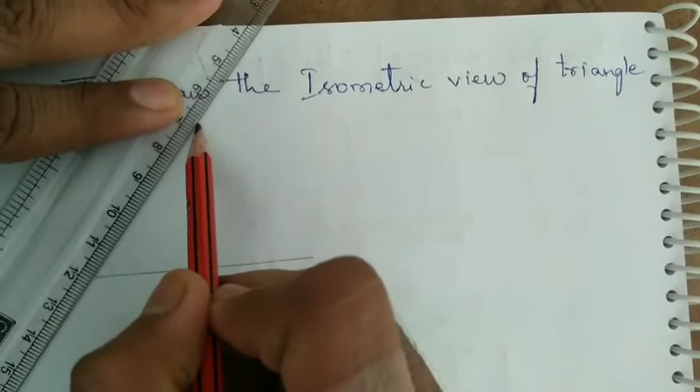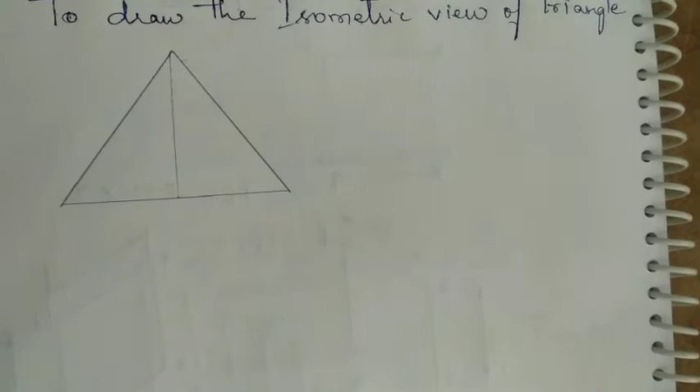This is the triangle we need to draw the isometric view of. How do we draw the isometric view? We need both the isometric front view and the isometric top view. The side given is 60 mm and the height is 40 mm.

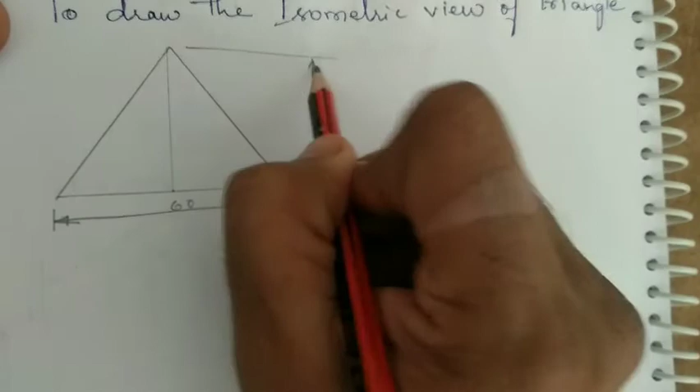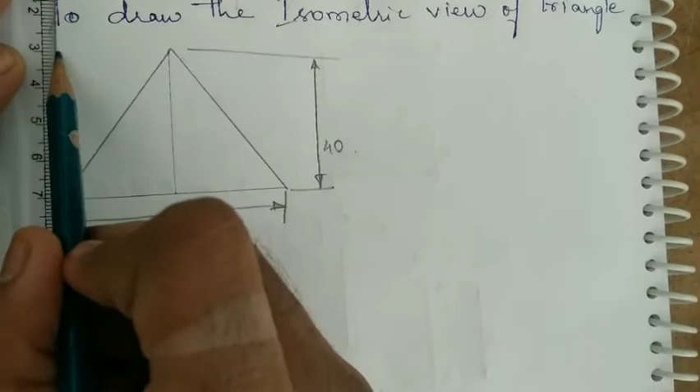So right now we need to draw the isometric view of this one. How do we construct it? We are already familiar with drawing a square, so based on that I'm going to construct this one by enclosing this triangle in a square box.

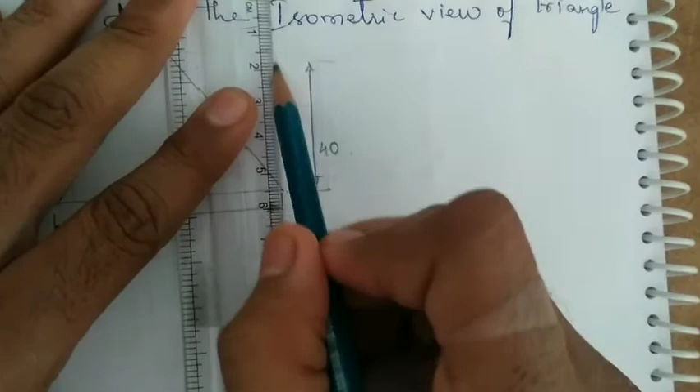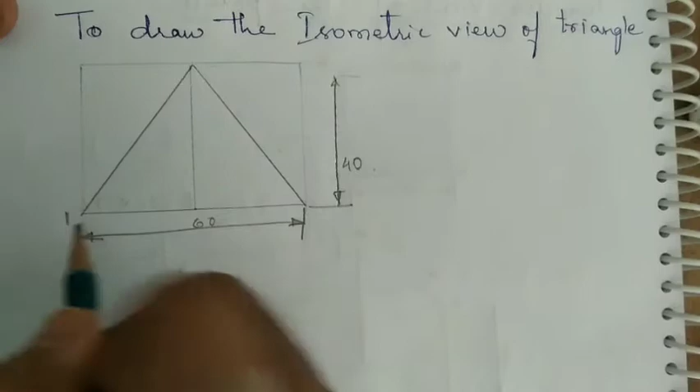Now that I am enclosing this complete triangle in a square box with borders, let me mark these points with capital letters 1, 2, 3, 4. Now I'll draw the isometric view of this one, representing both the front view and the top view.

Draw the horizontal line, and divide it into two parts. Now measure the height of this one, around 40 mm, and the side of this one, at an angle of 30 degrees.

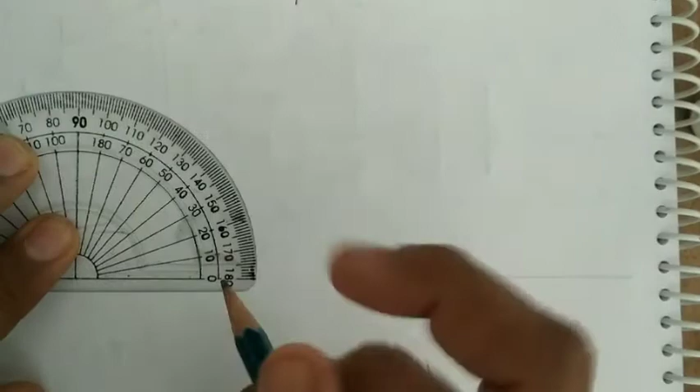So right now, from 1 to 4 the length is 60 mm. So I am taking 60 mm length over here at an angle of 30 degrees.

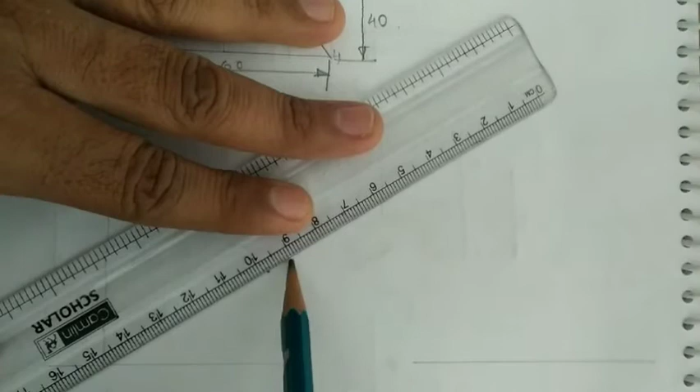And obviously this parallel height distance should be drawn at this corner. Now join this one with the parallel lines. Now you have drawn the isometric view of this one.

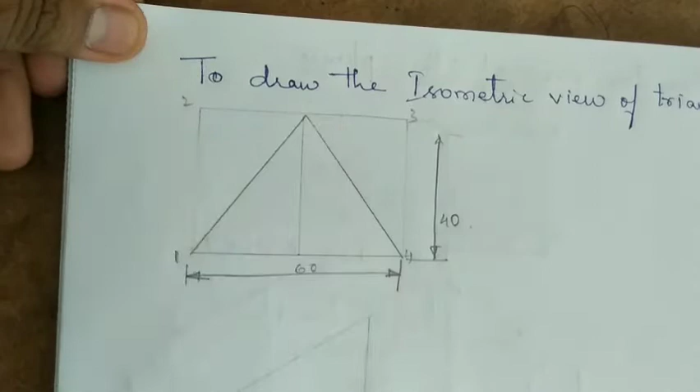That's the front view. Now measure the distance from 2 to half of this midpoint. Mark it on this isometric projection. You can use the compass for this, measuring the distance from 2 to half of this distance, and the same on the other side.

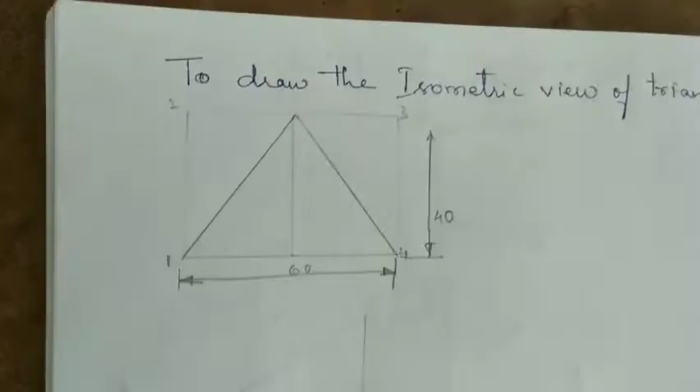First, before this, we make markings here: this one is 1, 2, 3, and this end is 4. Now with 2 as a center, cut down to find the midpoint. Now join it to this one.

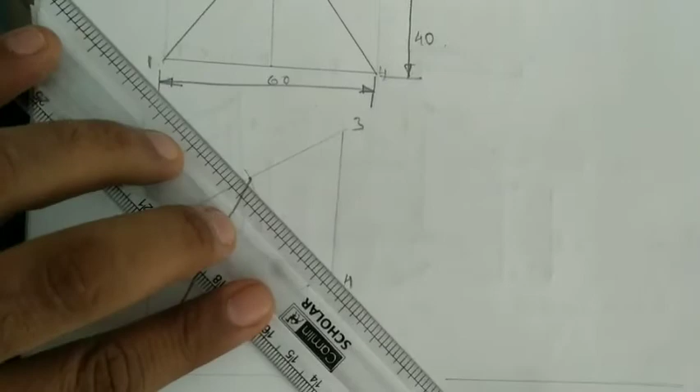And this bottom line should be darker. So this is my isometric view of the triangle.

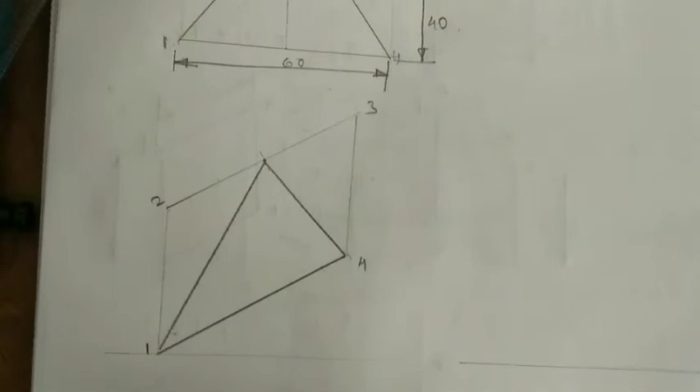This one we can take as the front view, and if required we can also take it as the side view. Now we need to draw the top view.

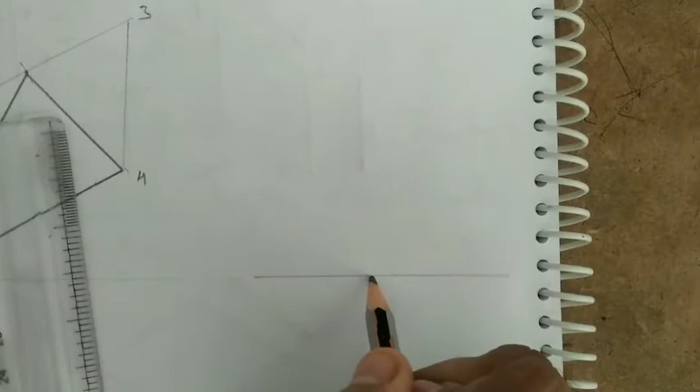In the same manner, for the top view, you need to draw two lines at 30 degrees. First I make a mark here. Considering point 1 is over here, I take point 1 and mark it at an angle of 30 degrees.

30 degrees over here, 30 degrees over here. So from 1 to 2 I take this side, and from 1 to 4 I take this side, at an angle.

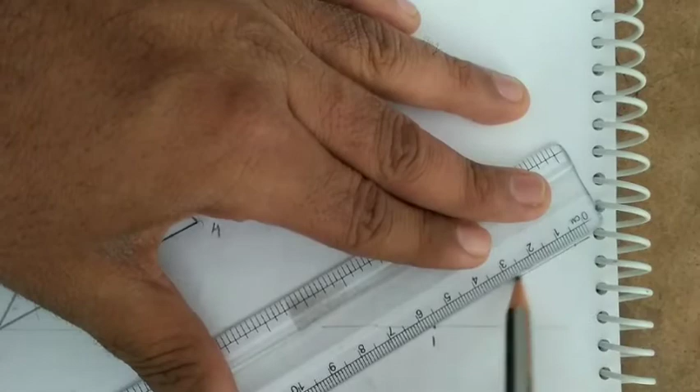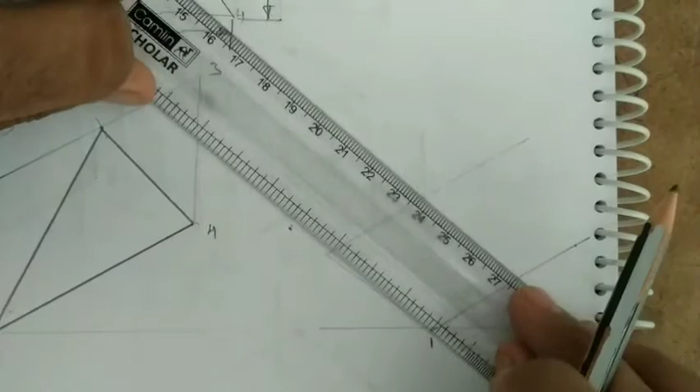The same manner should be drawn parallel from this point. You can mark the distance of 60 mm here and join it to this end.

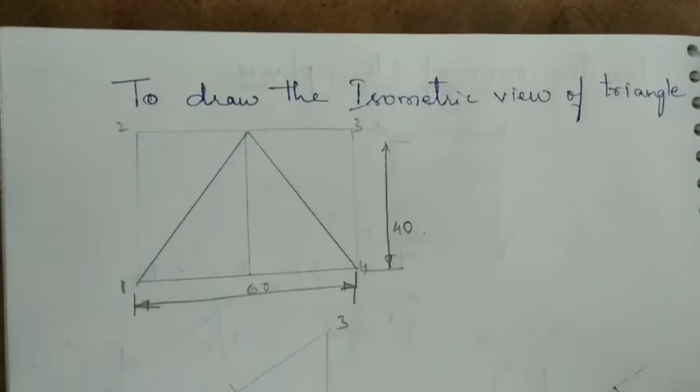This is the one. Now again in the same manner, using the compass, measure this distance with 2 as center. So this point is 1, this is 2, 3, and this is 4.

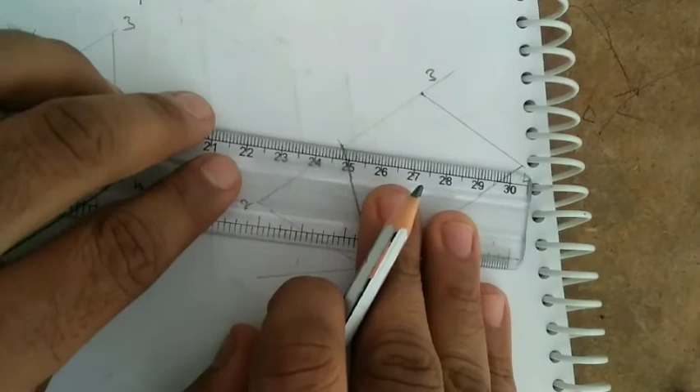Now with 2 as center, cut an arc here, and then join those points. Join 1 to the midpoint, and the midpoint to 4, and then afterwards join the base part also.

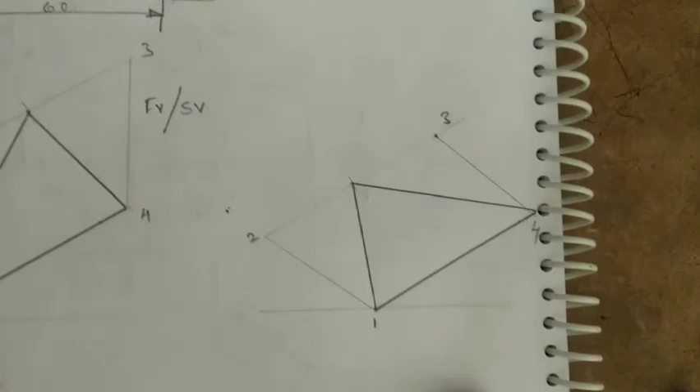So this is the isometric view of the triangle's top view. This one you can consider as the front view or side view, and this one is for the top view. So these are the isometric views of the triangle.